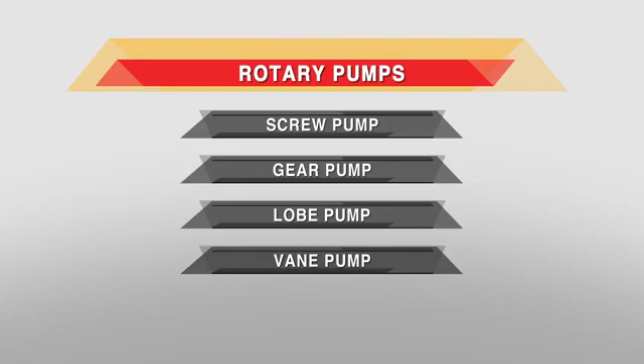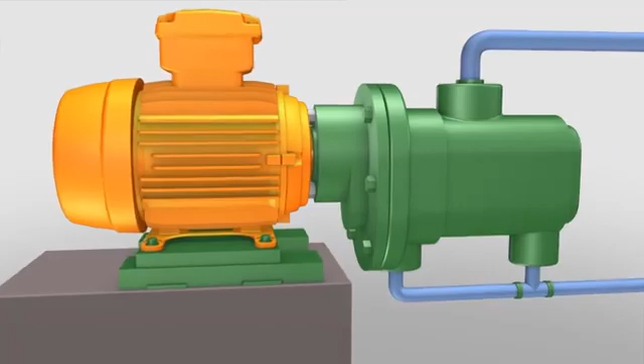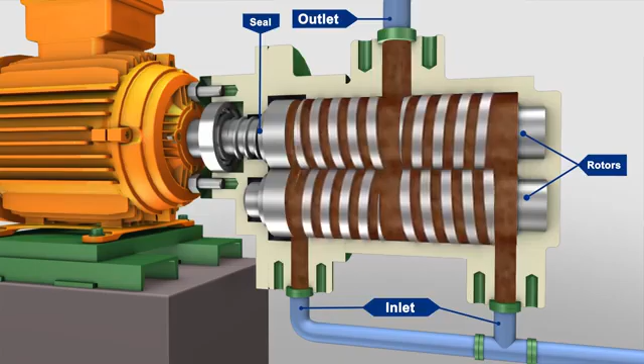In screw pumps, it is the intermeshing of the threads on the rotors and the close fit of the surrounding housing that creates one or more sets of moving seals in a series between the pump inlet and outlet. These sets of seals, or locks as they are sometimes referred to, act as a labyrinth and provide the screw pump with its positive pressure capability. The successive sets of seals form fully enclosed cavities that move continuously from inlet to outlet. These cavities trap liquid at the inlet and carry it along to the outlet, providing a smooth flow.

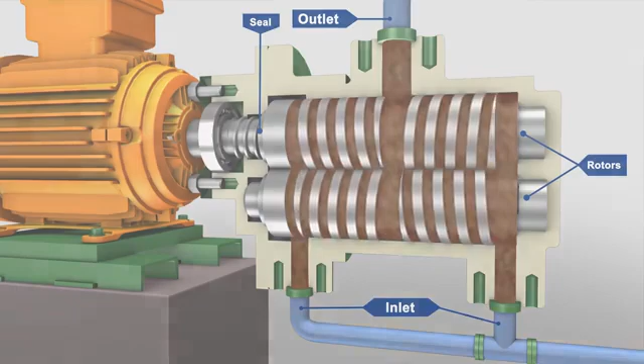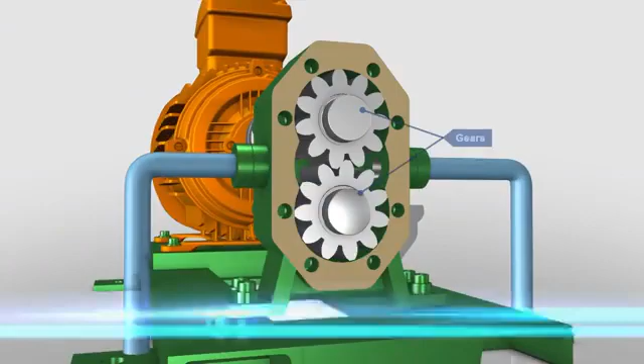The pump is so named because it has 2 gears that are side by side or external to each other. A drive gear that is driven by a motor rotates an idler gear in the opposite direction. When the gears rotate, the liquid, which is trapped in the gear teeth spaces between the housing bore and the outside of the gears, is transferred from the inlet side of the pump to the outlet side of the pump. The meshing of the gears on the discharge side of the pump forces the liquid out of the pump and into the discharge piping.

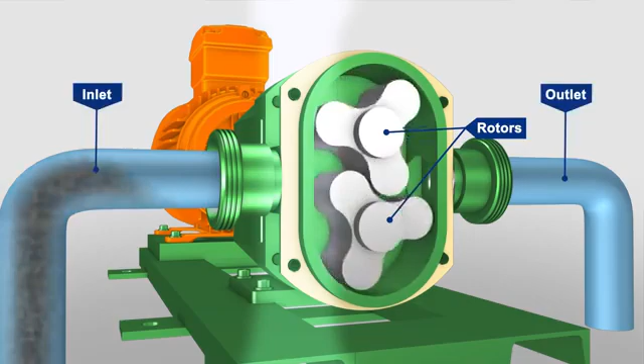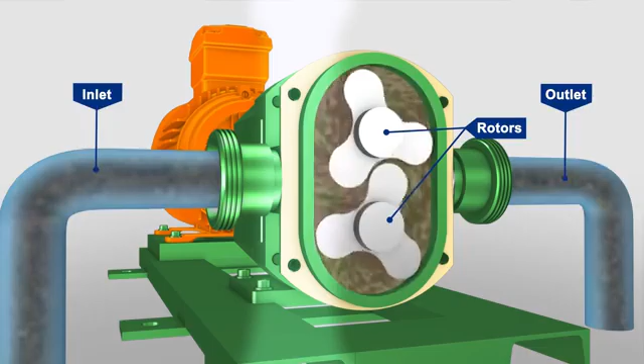The lobe pump receives its name from the rounded shape of the rotor radial surfaces that permits the rotors to be continuously in contact with each other as they rotate. Lobe pumps can be either single or multiple lobe pumps and carry fluid between their rotor lobes much in the same way as a gear pump does. Unlike gear pumps, however, neither the number of lobes nor their shape permits one rotor to drive the other, and so all true lobe pumps require timing gears.

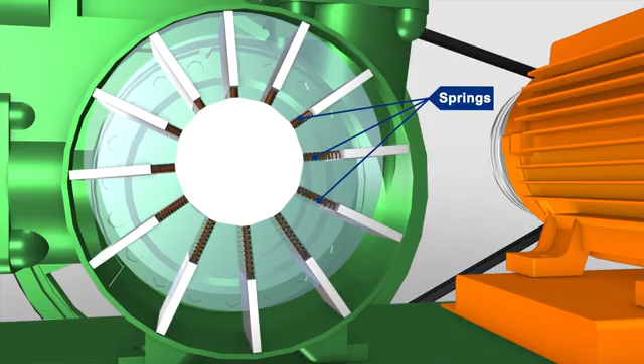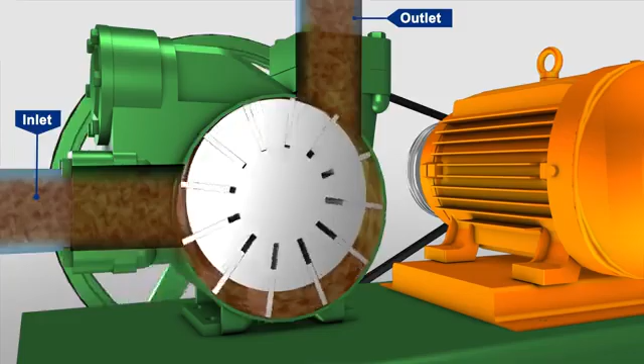The vane pump includes a rotating cylinder containing equally spaced radial pistons arranged radially around the cylinder center line. A spring pushes the pistons against the inner surface of an encircling stationary ring mounted eccentric to the cylinder. The pistons draw in fluid during half a revolution and drive fluid out during the other half. The greater the ring eccentricity is, the longer the piston stroke and the more fluid they transfer.

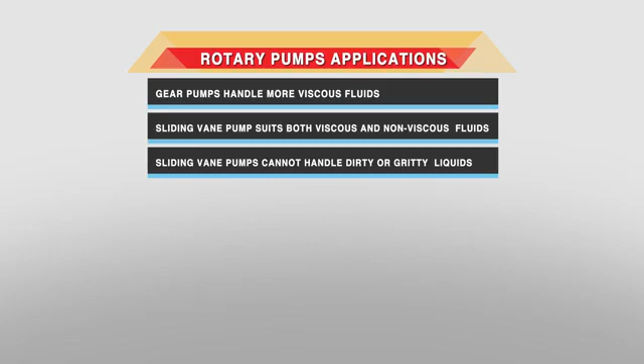Applications of rotary pumps are: gear pumps handle more viscous fluids. The sliding vane pump suits both viscous and non-viscous fluids. Sliding vane pumps cannot handle dirty or gritty liquids. Vane pumps are ideally suited for low viscosity, non-lubricating liquids. Sliding vane pumps are used for vacuum services. Lobe pumps are used for food and beverage processing. Lobe pumps can handle both low and high viscosity fluids.